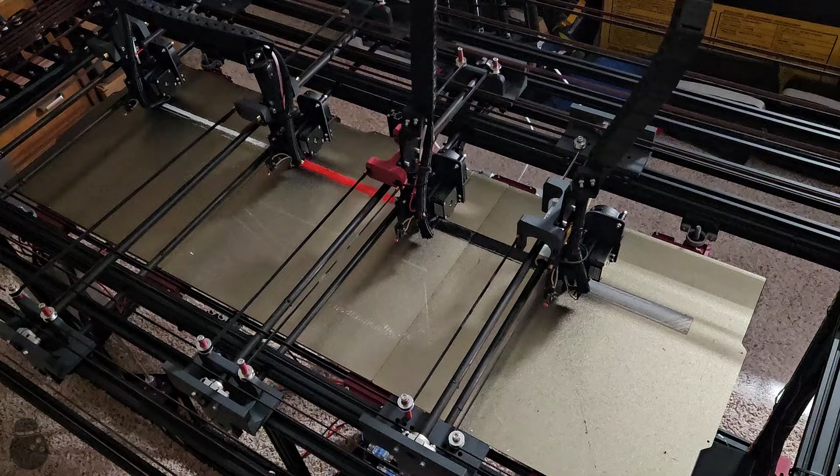Imagine all the things you could print if you didn't have to worry about print size or the colors or materials you wanted to use. Imagine what truly uncompromised printing looks like.

Basic printers let you turn your ideas to life, sure, but what if you want to print something bigger? Well, then you buy a bigger printer and are forced to wait longer to get your parts. What if you want multiple colors or materials? The existing printers can accommodate that, but at the cost of changeover time and wasted filament.

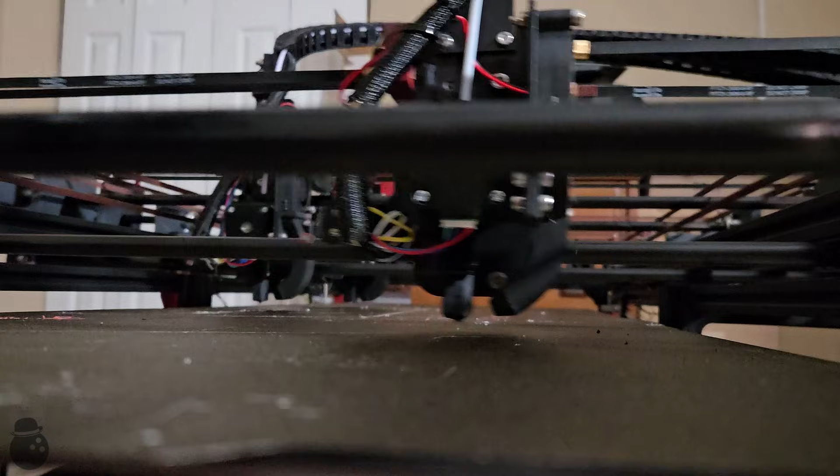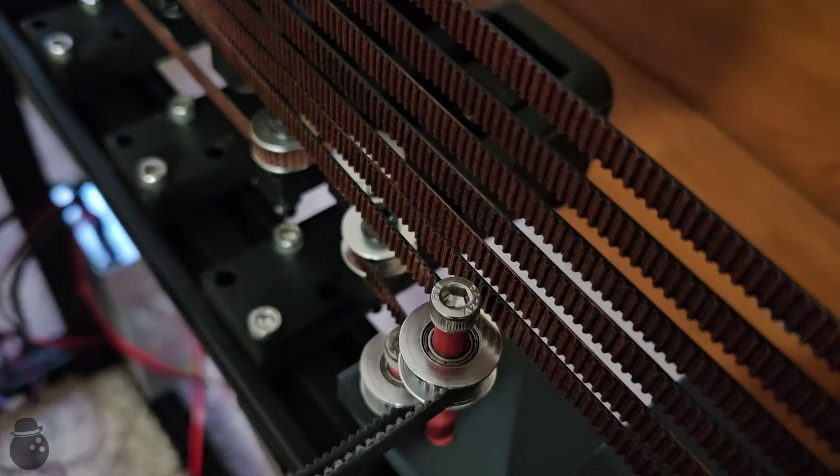What if you didn't have to compromise? What if you could print large objects in the same amount of time as small ones? Use multiple colors or materials with no changeover time because the printhead is already ready. That's where this printer comes in. A multi-head, simultaneous, independent, Core XY UV AB CD printer.

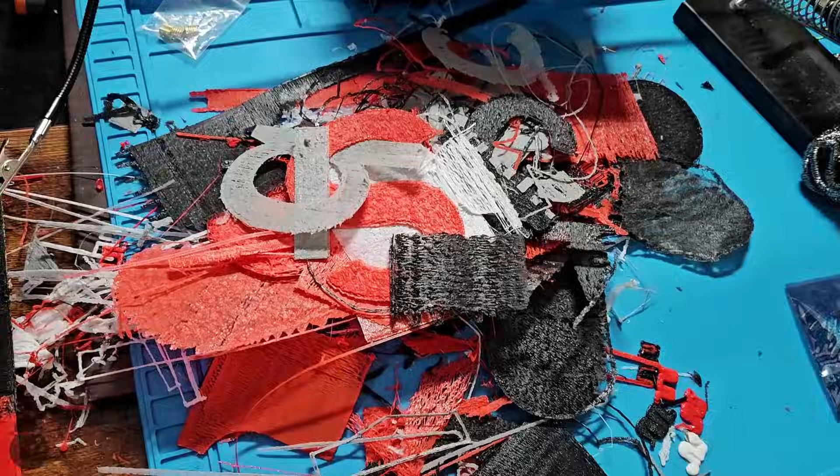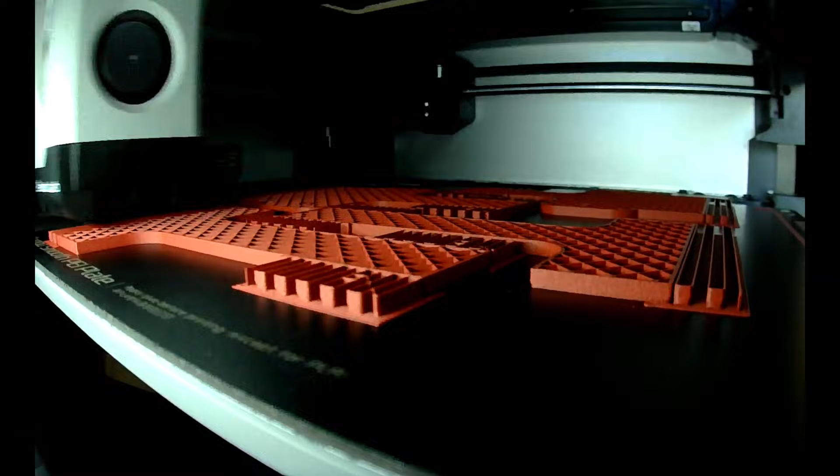It's taken me months to get this to the point I wanted to share and multiple failed prints and headaches, but here's the journey of how I built it and how you can get one yourself. The structural parts are made of carbon fiber rod and extruded aluminum, cut to size. The bulk of the rest of the parts are all 3D printed. There are quite a few of these, totaling 83 unique parts and just over 10 kilograms of plastic to print them all.

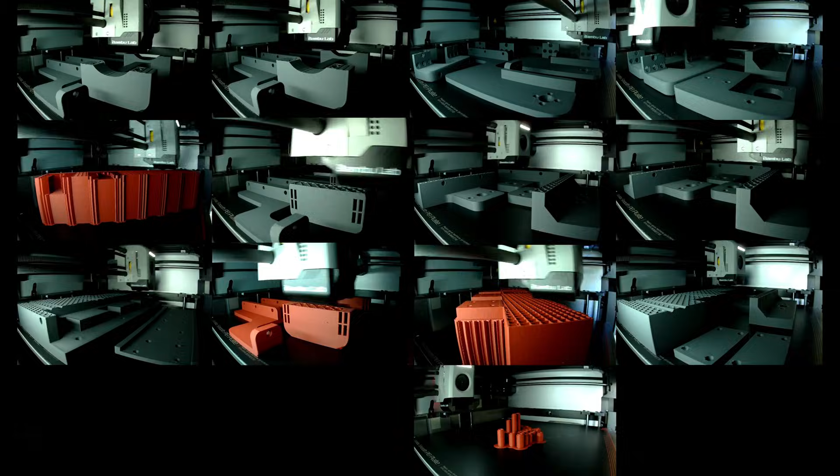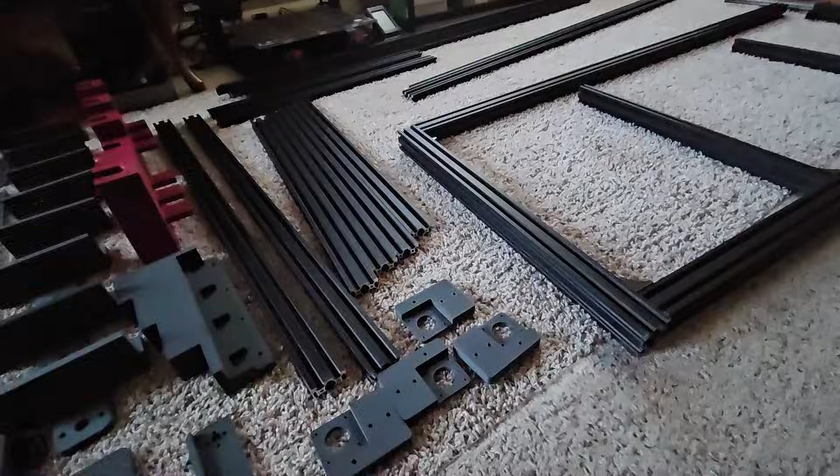The remaining items are all off-the-shelf components, most of which can be sourced via Amazon. I'll be honest, it is quite intimidating when laying all the parts out, but the satisfaction of putting it together quickly overtakes that feeling. The frame is sturdy and held together with a combination of metal brackets and plastic brackets held down with sliding and locking fasteners. The rails atop the frame are loaded with stages whose gantries span the slightly expanding rails, allowing them to nest within one another.

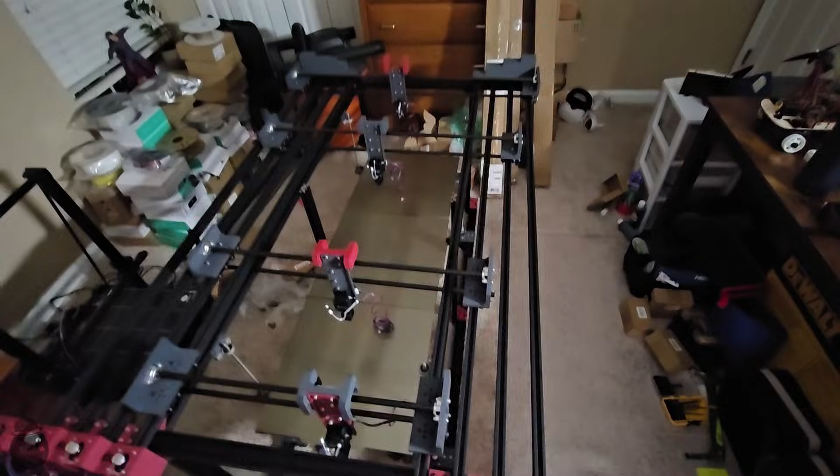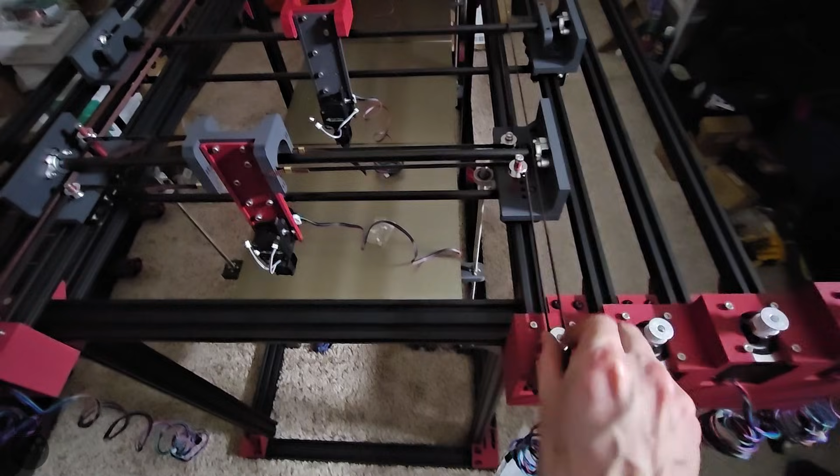The print bed is made up of three 410 by 410 mm heat beds. This enables efficient overlap and collaboration across the long direction. The motors in the front have corresponding pulleys in the rear, which establish the layered 3D maze of Core XY belts. The belts are wrapped around and driven by the motors, and the H-like shape allows the motors to move the printheads quickly, since most of the weight isn't on the printhead. Placing the last loop completes the motion system and leaves this pretty neat web of belts.

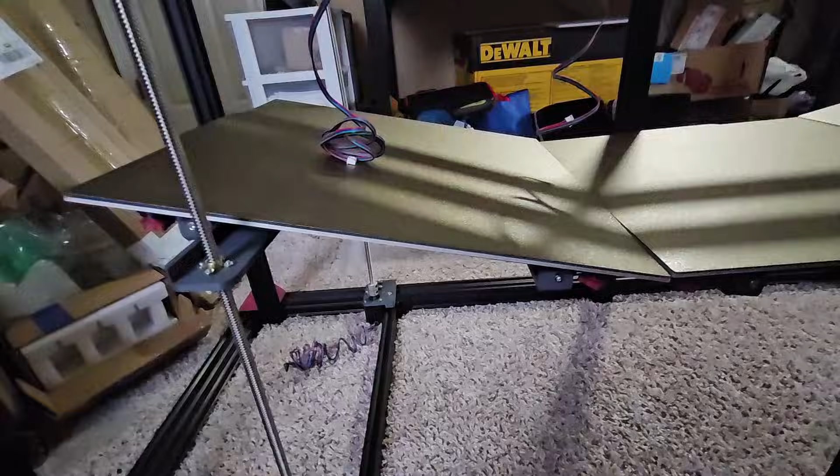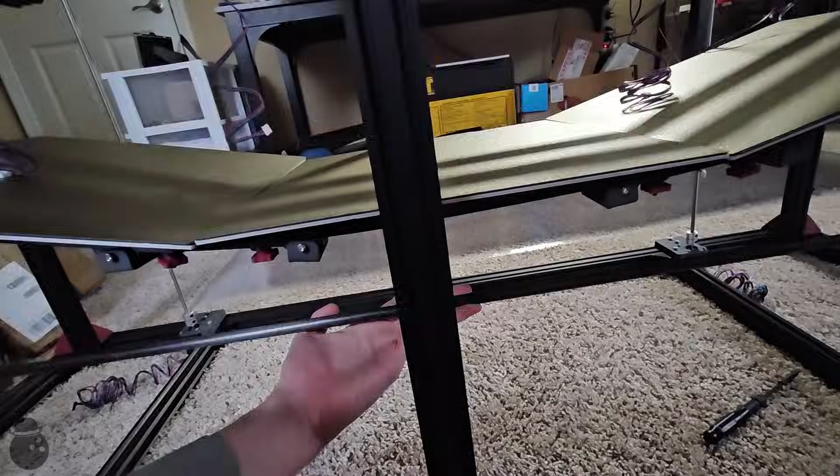My original design for the print beds involves a fully printed support structure, which isn't quite flat. The leftover carbon fiber rods seem to improve this significantly. With a few printed parts to hold them together, I can assemble and replace the frame, which leaves a much flatter work surface.

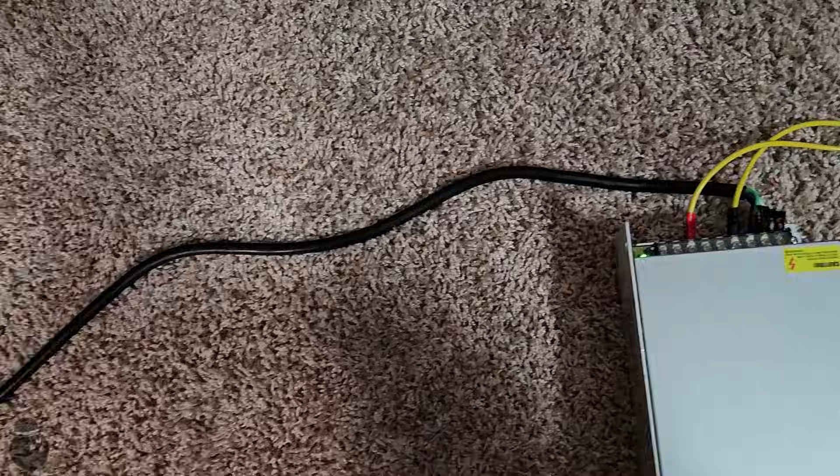I selected the Duet high current CNC electronics boards for this project, which require all the wires to be terminated in connectors. Wiring up the board to power and throwing on a basic configuration script, I was able to get motion. The boards are driven off of a very convenient web interface. The wiring for this project is a bit involved, with many of the off-the-shelf parts needing their wires extended in addition to having their connectors crimped up.

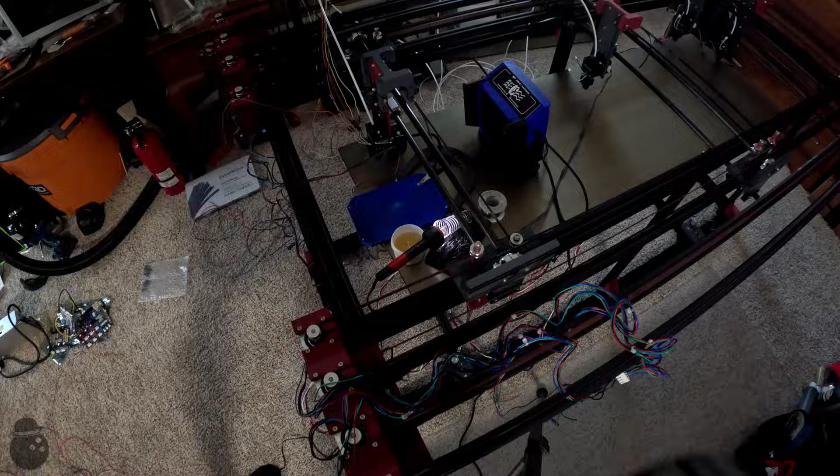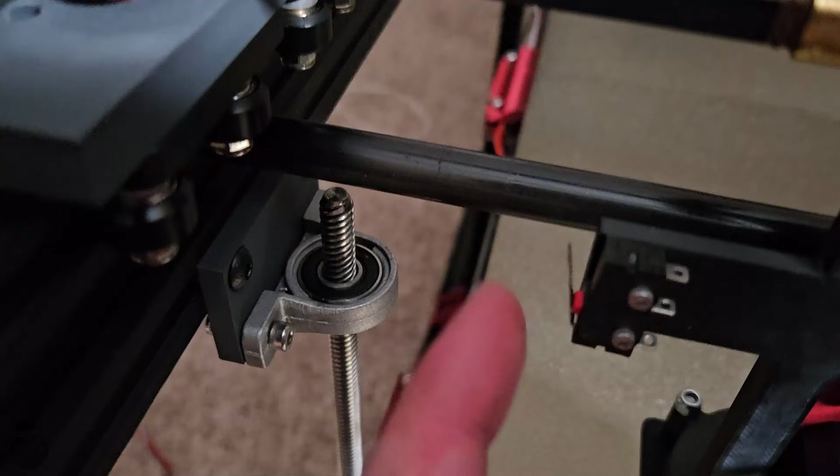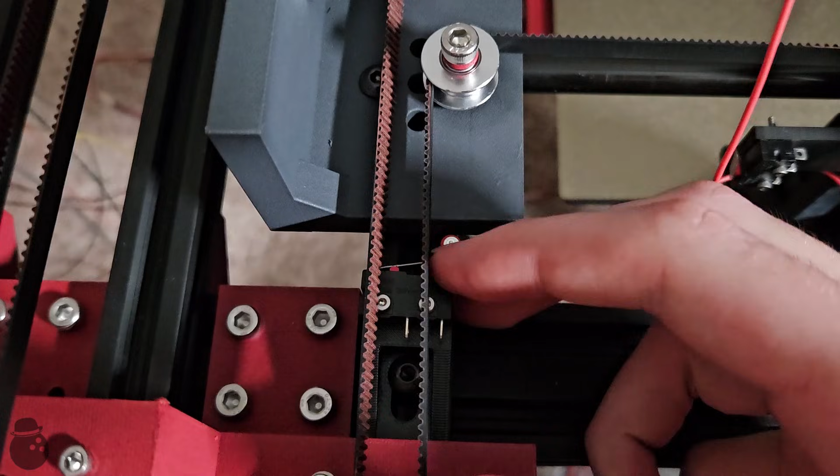With 4 stages, each with an extruder, 2 fans, a hot end, a thermistor, and an end stop, as well as 8 XY motors and 4 Z-axis motors, the wiring got somewhat tedious, but with enough music and patience, it isn't too bad. The X-axis end stops are slightly elongated to clear the Z-axis lead screws and contact the leftmost rails to 0. The Y-axis has end stops that are offset in the front of the printer to allow each stage to 0 without collision. They also set the minimum distance between stages.

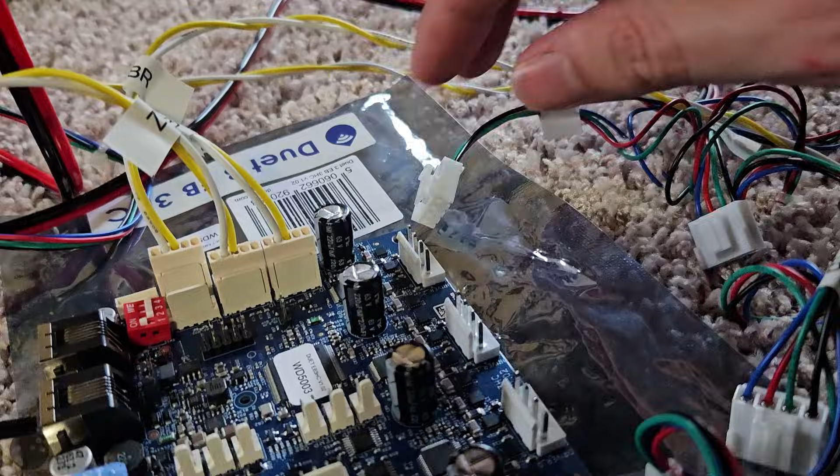With just over a dozen 2-meter long wires extending from each head, wire sheathing was a must. The wires then feed over the side of the printer and plug in neatly to the Duet boards. At the rear of the printer are 2 high wattage power supplies, which should both be able to work off of a single US wall outlet. Belt tension is important to keep the motors from slipping, so I printed out some test tensioners and installed them, which were sufficient enough to let the printhead make circles without slipping. Loading in some filament confirms the wiring was correct and that the printer can heat and extrude.

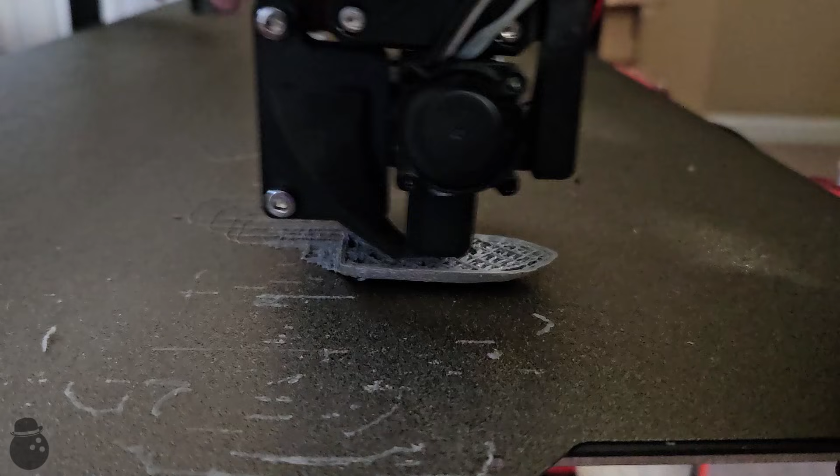For the first print, I simply loaded a Benchy into a standard slicer for a 410mm square bed and pasted it into the Duet software. The defaults in the G-code were in millimeters per second, and this printer needs millimeters per minute, so we get this very slow printing. Multiplying the values by 60 at the top of the G-code let the printer actually print. The belt tension still needs improving, as we were skipping steps and drifting the layers. When it doesn't skip, it prints fairly well. When it does skip, well...

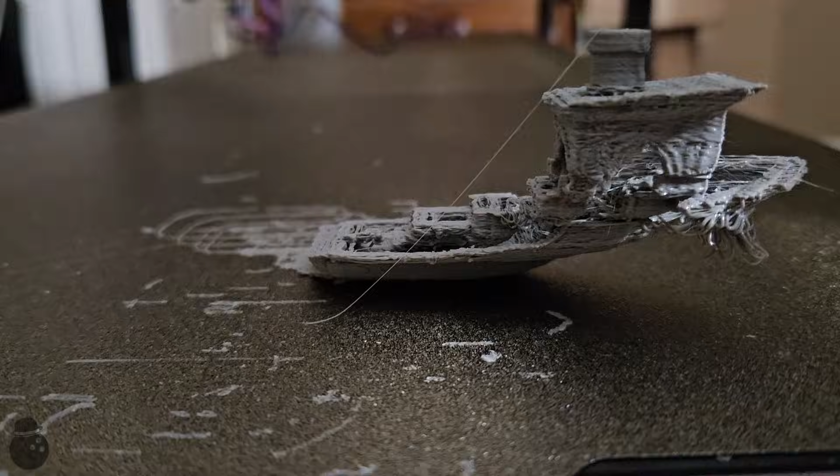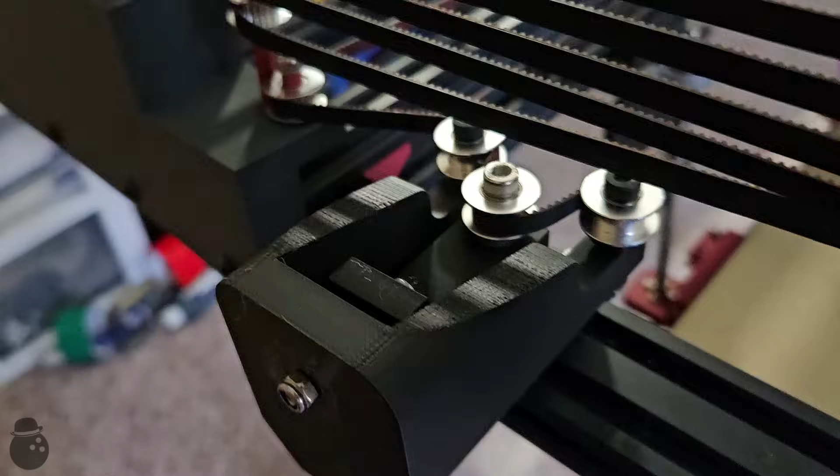For a first print, it was okay. You can at least sort of tell what it was supposed to be. I improved the design for the tensioners and affixed them to the rear of the printer for ease of access. Unfortunately, my attempts to tighten the bolts and increase the tension sheared through the rear belt pulley mount. This piece is a rather structurally important piece, so orientation and full infill are important.

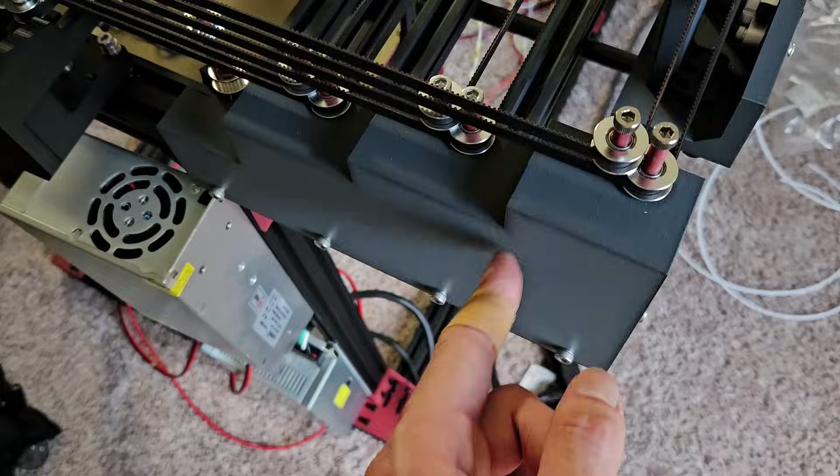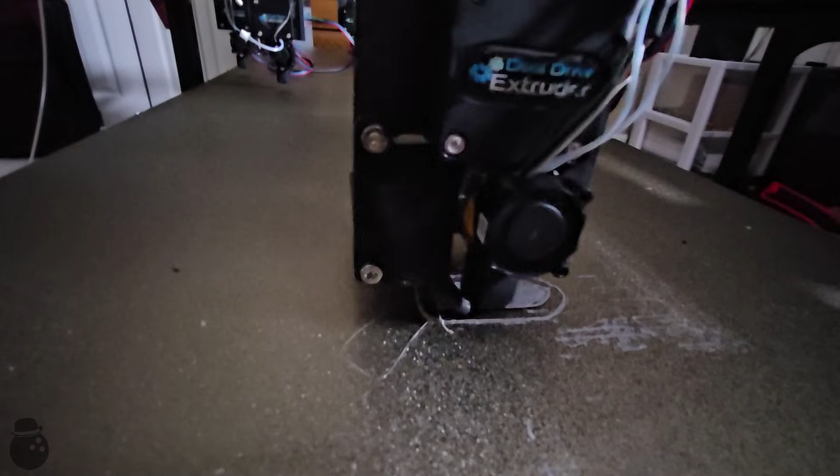The improved tensioners work wonders at stopping the drifting. It also helped that I increased the total allowable amperage within the configuration file to be closer to the motor's rated current of 2 amps instead of the 40% cap that they were set to. Those changes, however, did nothing to fix the filament I had accidentally broken within the very long Bowden tube. Whoops.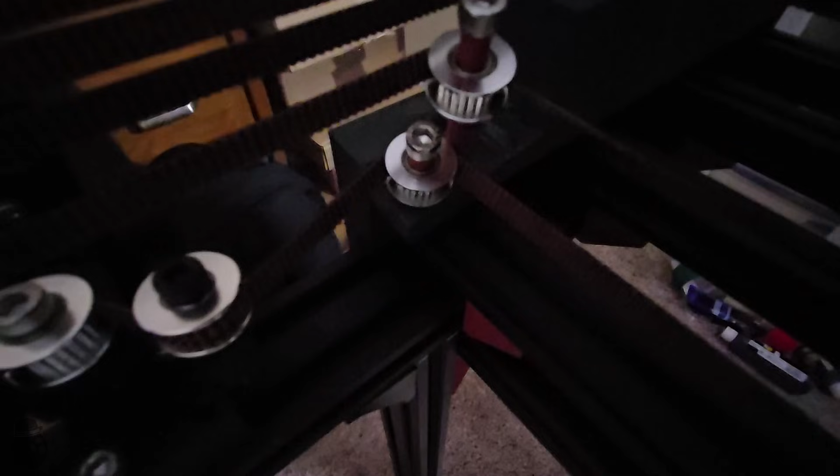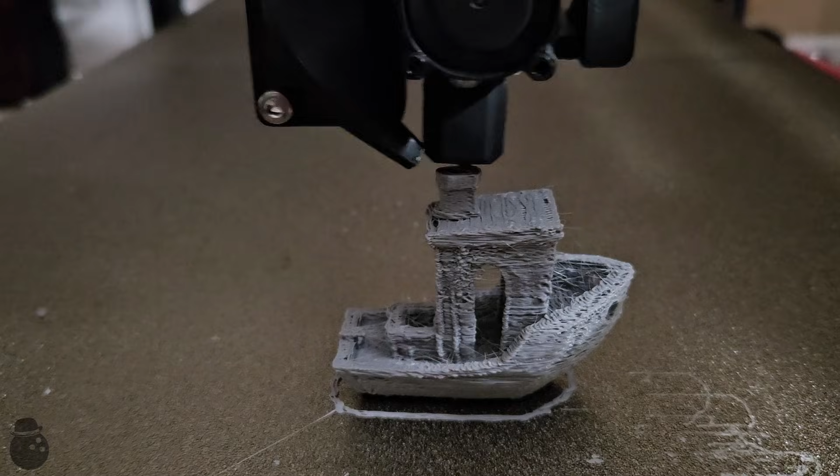Fixing that revealed bed adhesion is a problem. But hey, what was just a pile of metal a few minutes ago is making things. It also looks like the other rear pulley mount is failing, which I should have seen coming. Another full infill print should fix that. There we have it, our first benchy. Print quality leaves a bit to be desired, but we can work through that.

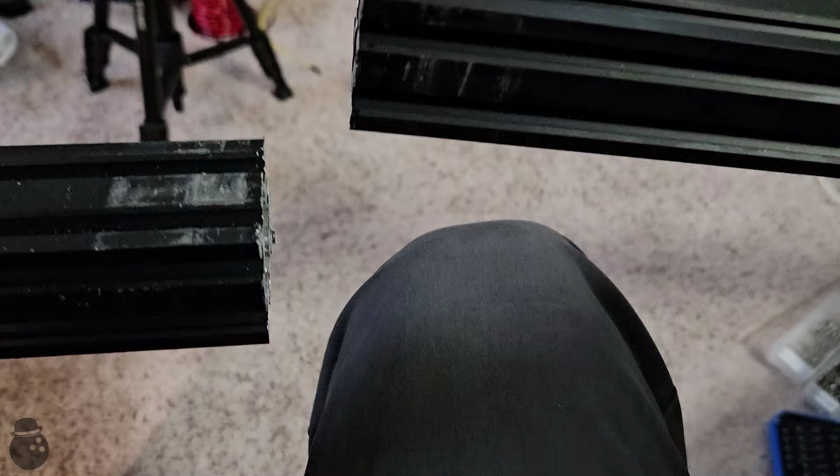Circling back to the bed adhesion problem, it appears that the carbon fiber tube frame is still not quite rigid enough and creates considerable bowing in the center of the bed, furthest from the Z-axis lead screws. Measurement reveals as much as 4 millimeters of deflection, which simply won't do when trying to have these printheads work together. We can reinforce the bed frame with the leftover 40/40 extrusion. Cutting to length and printing some structural clasps let it attach to the bed.

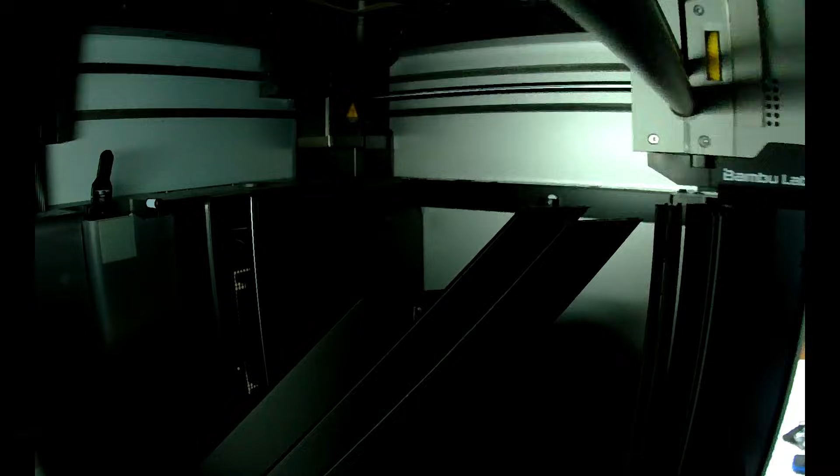To clean up the wire routing, I printed a containment plate. To it I added a cable chain and a wire cage to keep the wires from sagging onto the print bed. I then printed the remaining tensioners for the other 3 print heads. The relative heights are offset to prevent collisions across belts. Staggering their order further aids with this.

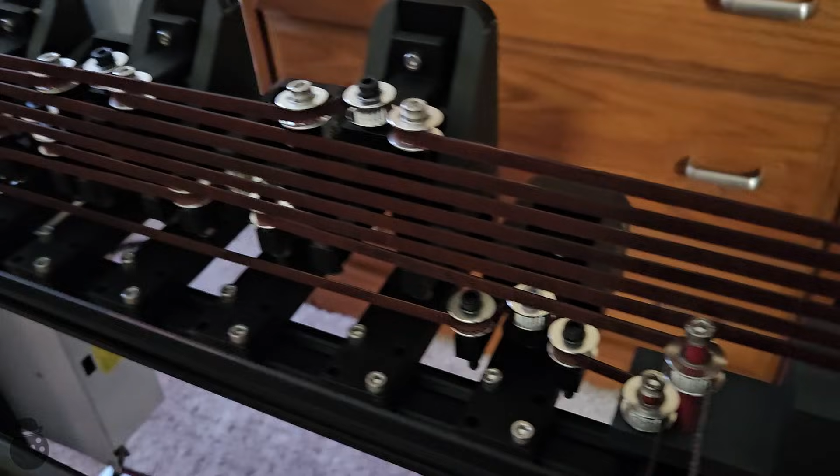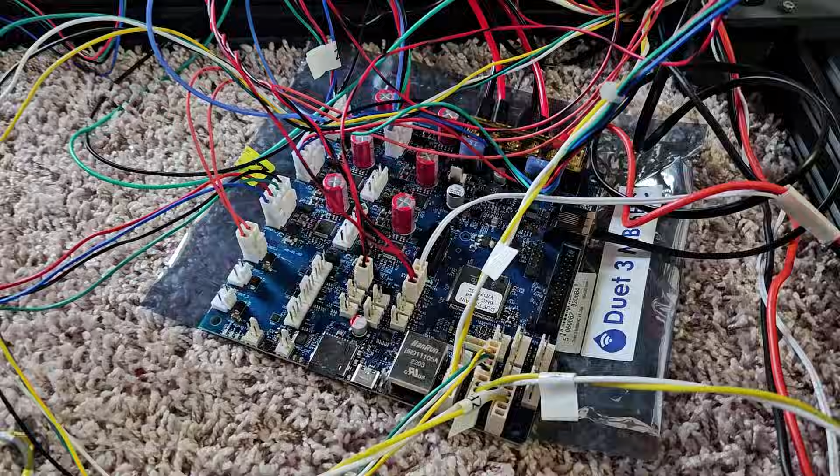The bed springs I had were not nearly strong enough for the weight of the 3 large beds, and get replaced by these high stiffness yellow ones. To affix the electronics and take them off my carpet, I printed mounts which hold both the main board and the expansion boards just off of the floor and on the frame. The hectic wiring quadrupled with the addition of the wires for the other 3 heads.

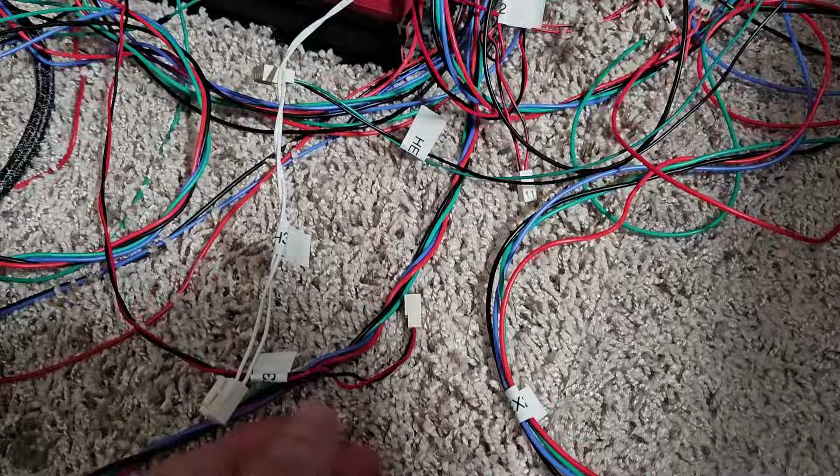Additional expansion boards and their mounts receive those wires and this Wi-Fi adapter, which allows me to stop needing a long Ethernet cable to communicate. For the boards to talk to each other, they use a CAN communication, the wires for which need to be the high-speed kind, and not the cheap phone wires that I happened to buy. With over 100 wires and most of them looking the same, labeling them was the only way to keep anything straight.

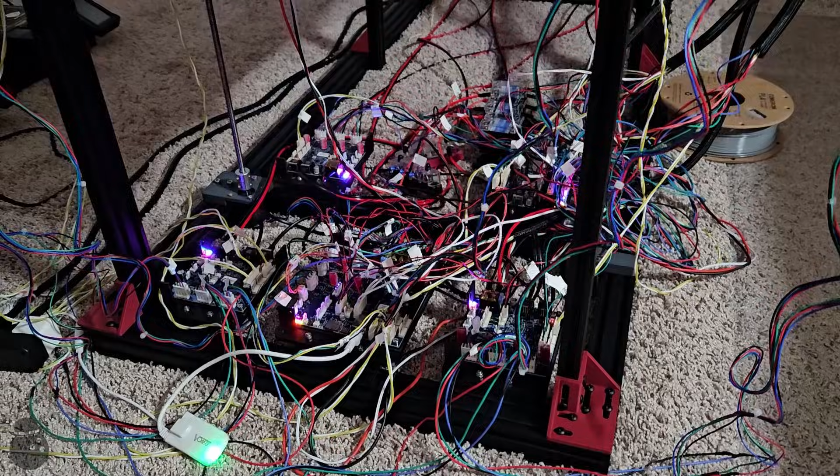To heat the beds and not overload the wall outlet, I have the print beds on individual solid-state relays, allowing for sequential heating routines. Placing the remaining wires into their channels and wire cages cleaned up the look considerably. Plugging in a power strip with both power supplies and the Wi-Fi adapter reveals that my wiring was all correct and everything glows appropriately. By configuring all 4 heads as a gang tool, I am able to move them all together in unison.

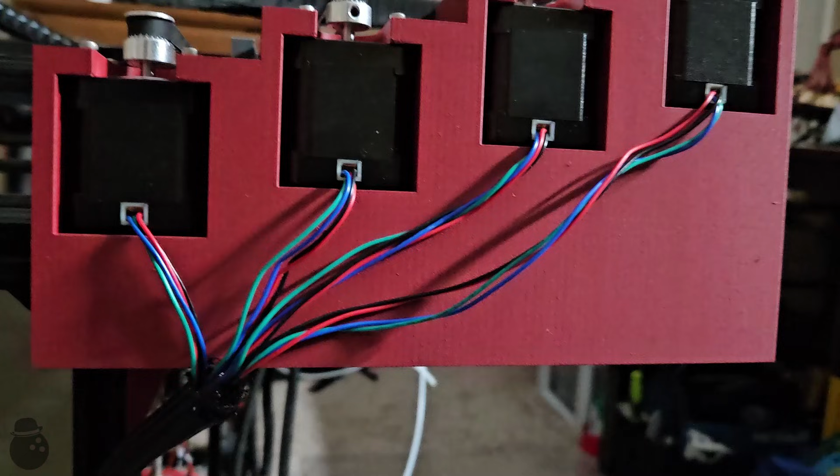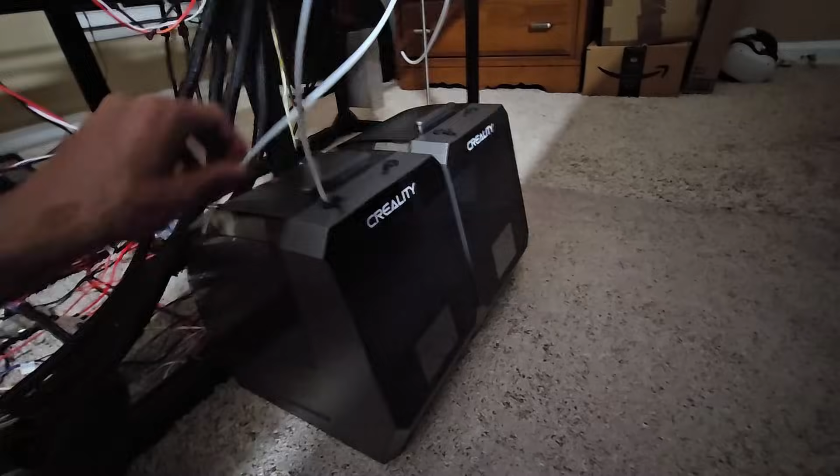Wire sheathing helps to declutter the drive axis motors on both the right and the left sides. The Bowden tubes still need to get cleaned up, but a handful of zip ties allow me to reduce the rat's nest that is these wires. These filament dryers neaten up the Bowden tubes and should allow for the printing of most engineering materials.

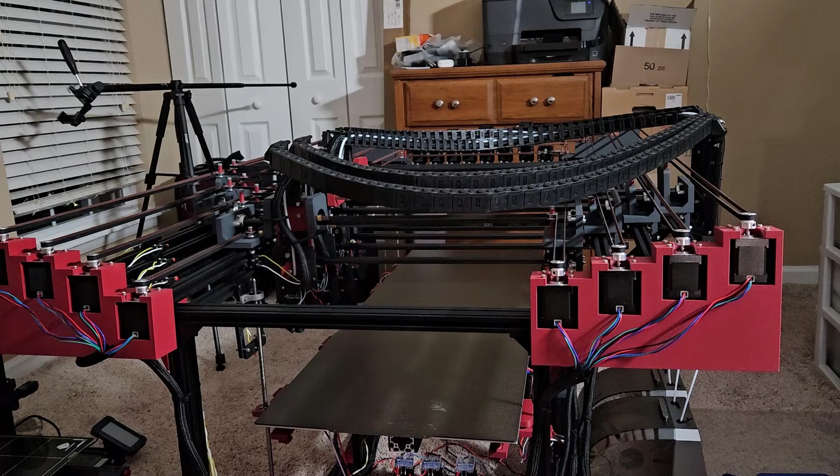Multiple heads require a custom homing script to dial everything in. To do this, I have various steps that drive all the heads as a gang tool and then pivot to singular head movements for fine zero. In the long axis, which I call Y, the printheads home sequentially, front to back. This ensures that they don't collide with one another.

To collaborate, the printheads are going to have to all be roughly the same height. Unfortunately, head 4, the rearmost, is going to begin its journey being the problem child of this build. While paper slides freely under the first 3 heads, number 4 dropped to contact the bed. At such a large span, this printhead's carbon fiber rods bow just enough more than the rest to cause issues.

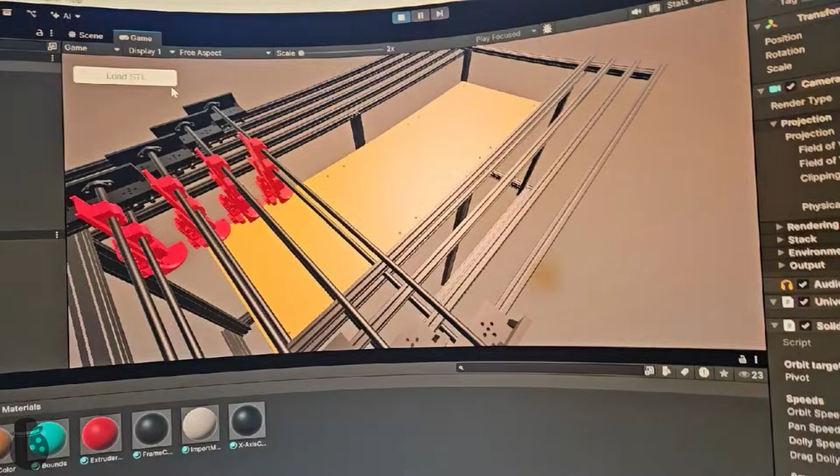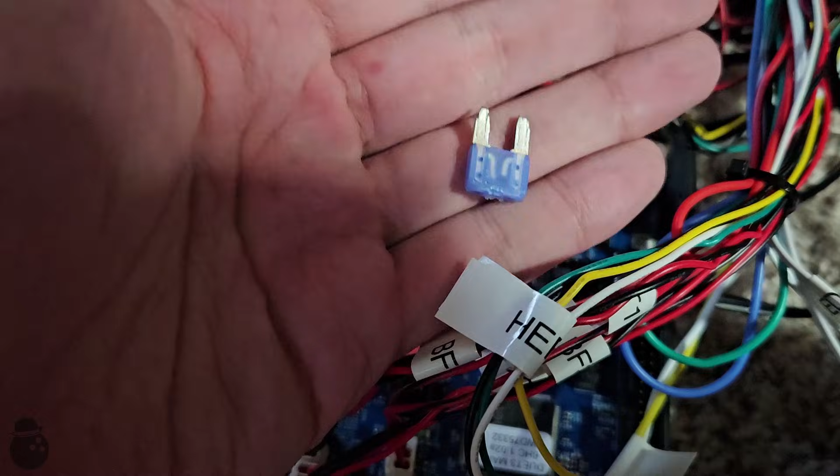To procrastinate the problem while I thought of solutions, I began writing the slicer for this printer. If I wanted to print anything collaboratively, I was going to need a custom solution, but I'll get into that more later. Powering multiple beds and relying on the Duet's fuse seemed like a good idea, but the initial surge of current fried the fuse. Luckily, they sell replacements, in packs of like 25. I don't really want to keep doing that, so let's give it a dedicated fuse.

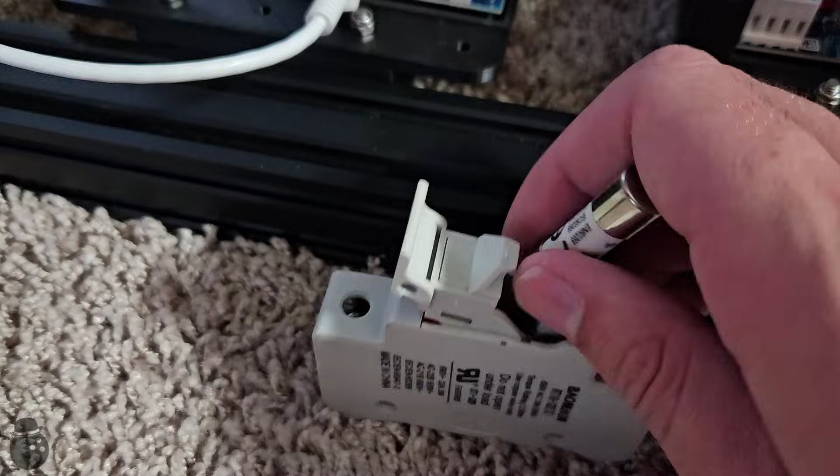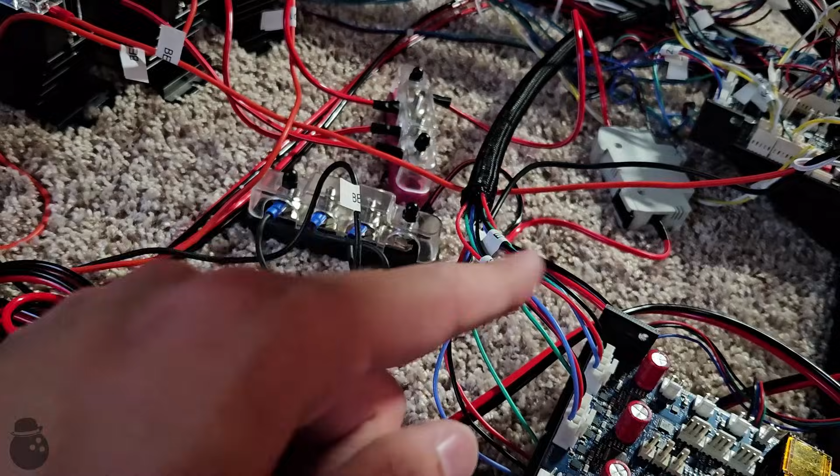This kind worked well for my filament recycler project, so let's try it here. The power runs from the power supply through the fuse onto the distribution terminals, which supply the solid-state relays with the opportunity for power. Each relay is controlled by wires from the Duet board, and the other side feeds up into the beds. It seems that this being an AC fuse for a DC system creates problems because this wire gets quite toasty. Why do I always have the most difficulty with the safety systems?

This 20 amp DC circuit breaker should fix that problem and let me reset it if I somehow trip it. Wiring it in and checking currents, it seems that I just misread the very confusing Chinese instructions for these solid-state relays and needed to swap which wire went to which. With that sorted and this circuit breaker in place, the correct current is going to the correct spots now.

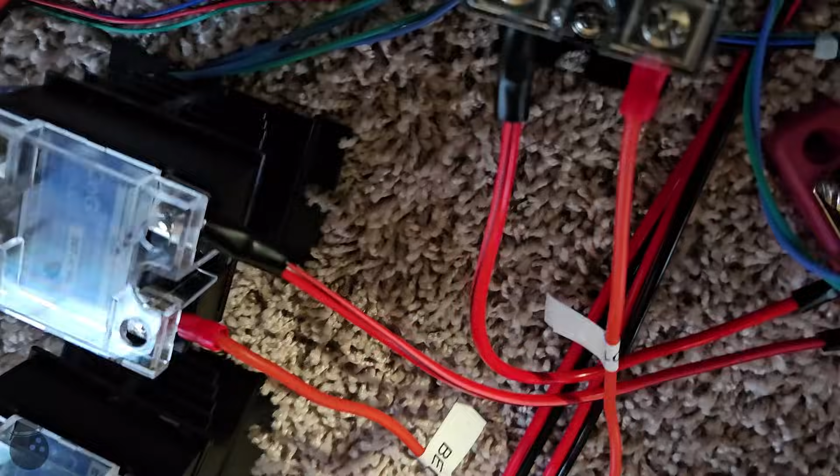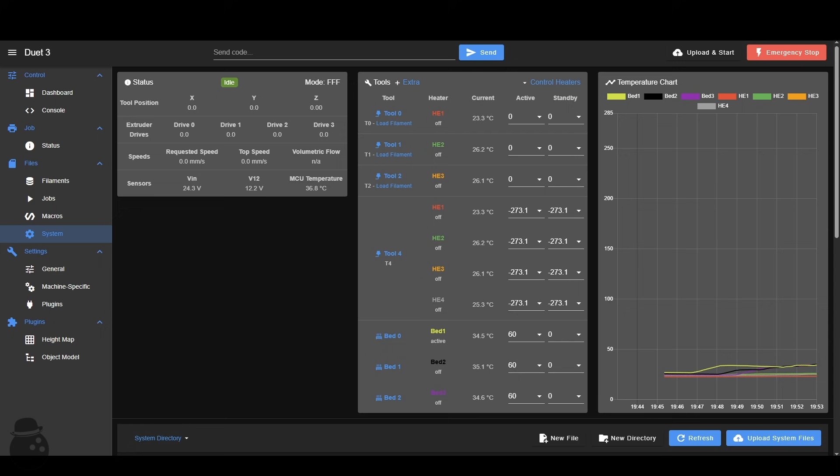To get this to work with Duet was a bit tricky. I wrote a daemon program which checks for active beds and cycles between them to reach the set point. The daemon monitors the system and ensures that only one heated bed is on at a time. The clock speed is a bit slow, so at startup there can be a brief few second draw to multiple beds at once, but nothing the system can't seem to handle temporarily. The relays also light up when they're on, which allows for a visual real-world gut check.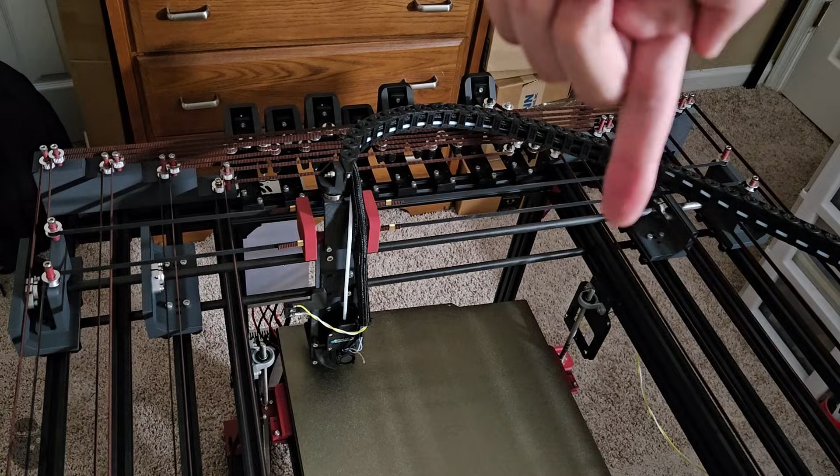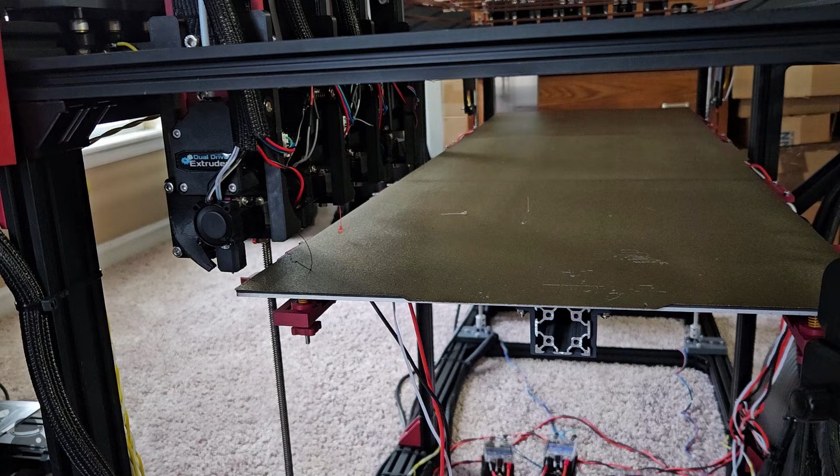Circling back on printhead 4, I found that I could simply add another support point on head 2's rails, and that created enough rigidity to solve the bowing problem. The orientation of the wire guides needed to be made vertical to afford them the motion they need without blocking the motion of the other heads and without touching the belts. With that solved, let's load up the Benchy print on the Gang tool to make 4 at once.

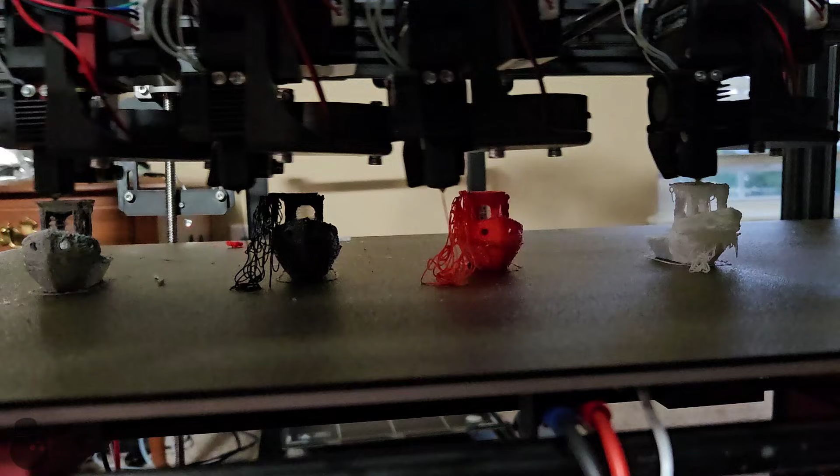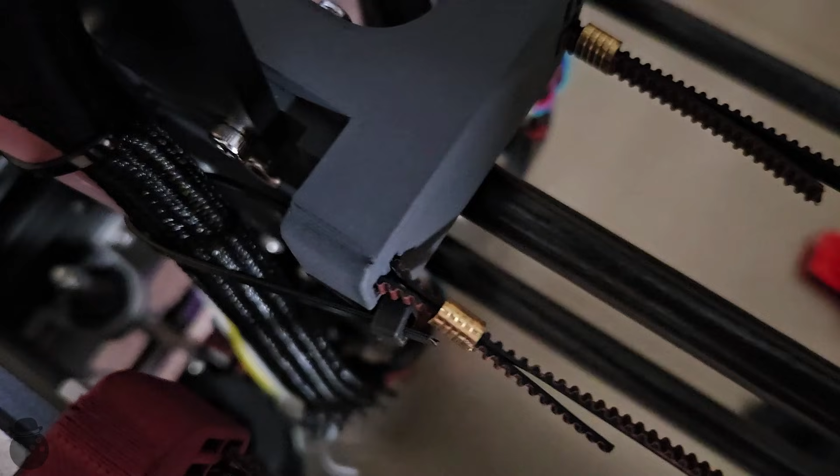Belt tension on the rear heads is clearly not quite dialed in yet. Regardless, the printer has made 4 Benchy-esque parts of varying quality. Investigating the belts further, it seems I fastened them too loosely, and with the belt facing the wrong direction within the clasp, which led to slipping. Multiple points along the printer are going to need to be updated. With that fixed, let's see what happens to print quality. Getting better, but still not what I want.

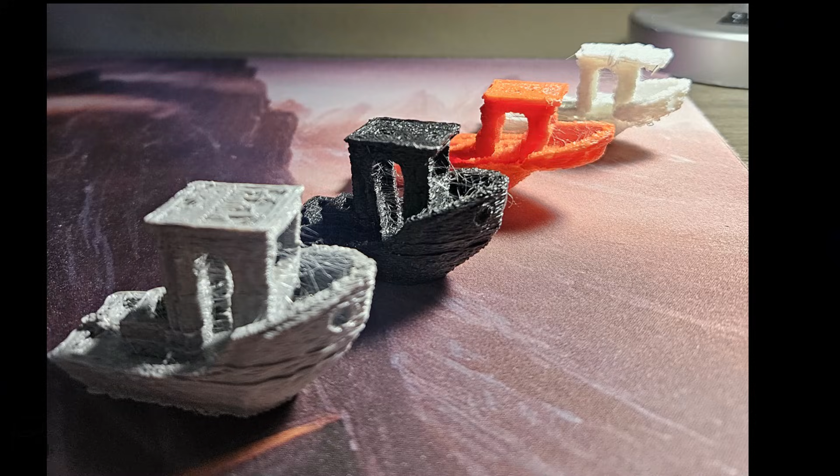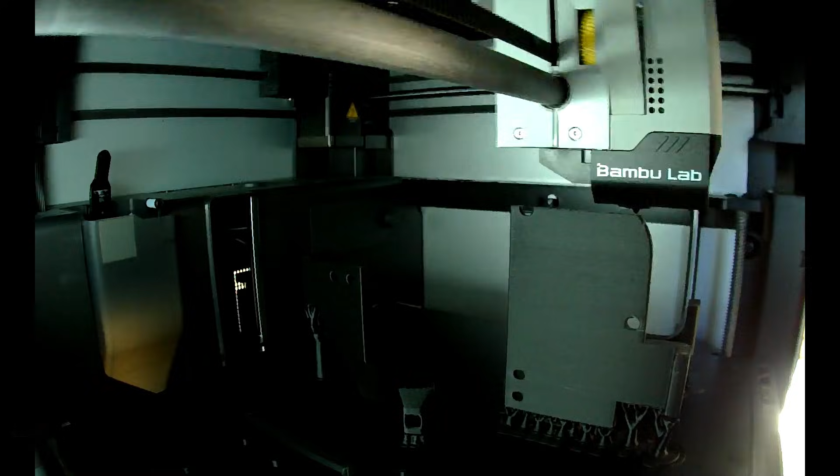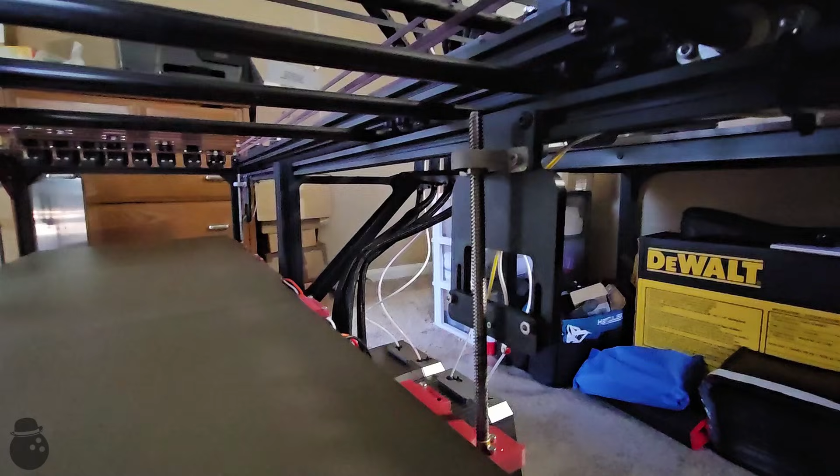I think that the quality issues are coming from the printheads being so long. If I consolidate the mass higher up, the print quality should improve, not to mention we'll gain Z volume. Printing it out quickly reveals the difference in size. The pieces rest much higher and more fully on their support rods. The nozzle tip ends up significantly higher. The increased nozzle height forces a redesign of the Z-axis limit switches. The first one attaches nicely, so now to do it 3 more times. The motion looks better with less wobble.

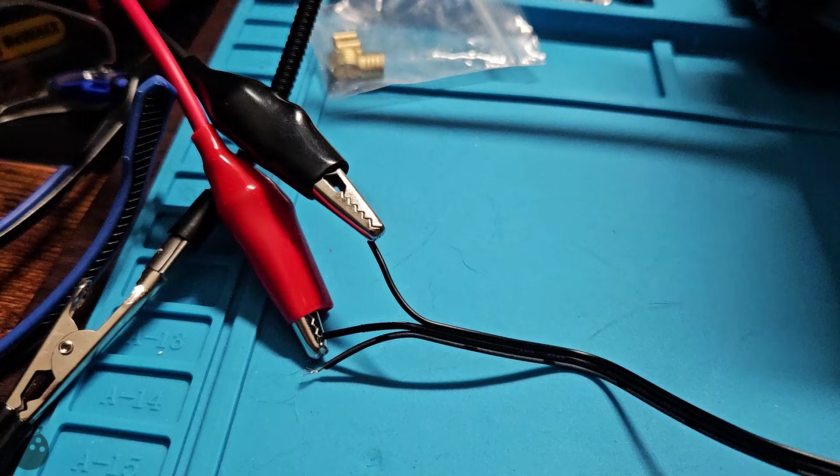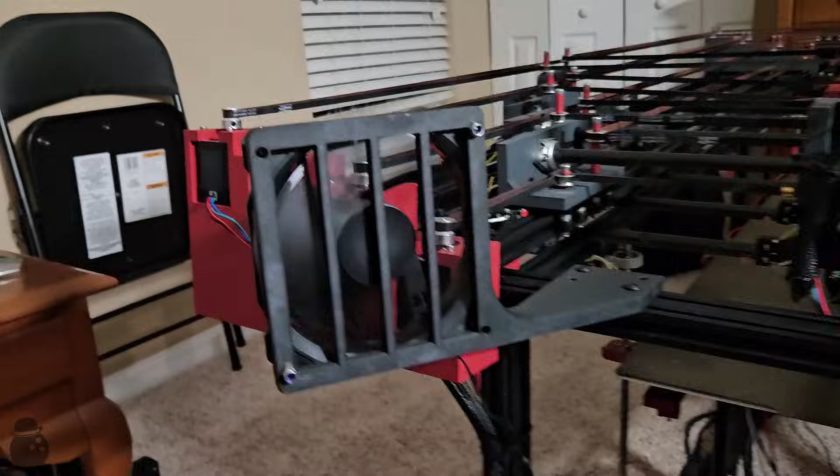I noticed that the electronics can get a bit warm during printing, so let's cool them down. A few computer fans with printed mounts let us cool the top drive motors and the lower electronics. The fans work nicely, and a mounting platform for the bed control stuff with its own fan helps to keep that tidy and cool. Loading filament with my hot end adapters has been a pain, so I improved them to be more sloped, which more easily guides the filament into the extruder. And with those, I'm extruding again in no time.

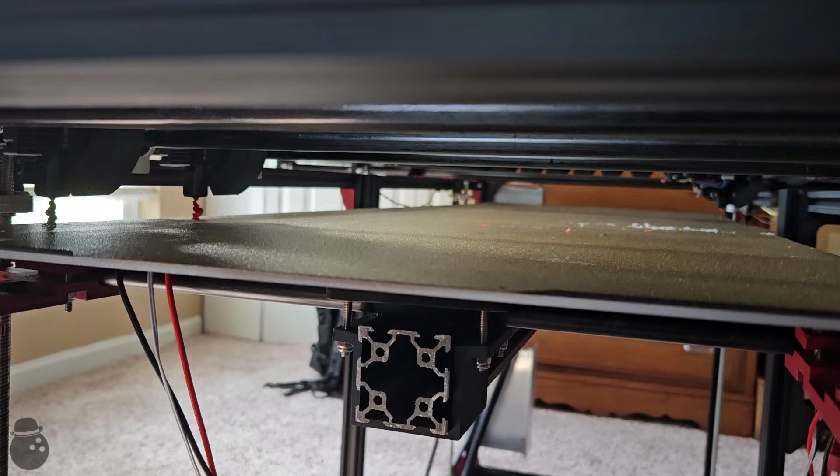Printhead 4 was in need of some lubricant, so I had it sit out this print, but this was looking very promising. Unfortunately, I had once again broken my brittle filament in head 1. Aside from that and some stringing, phase 1 of this printer is done.

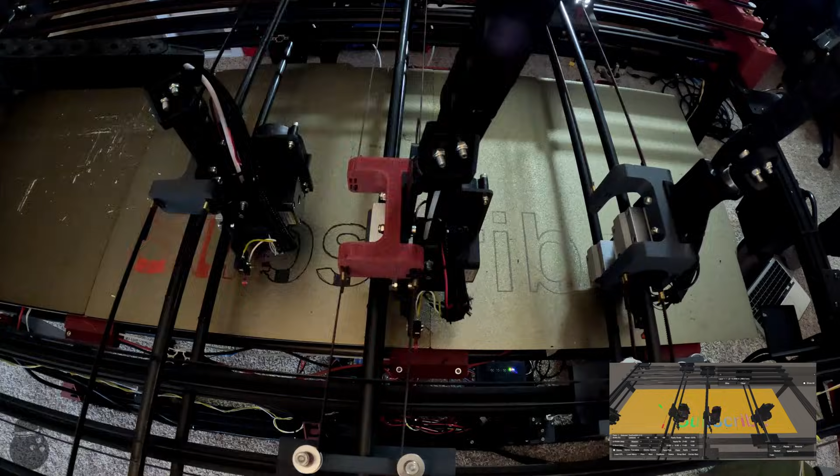Obviously, there's a lot more potential for this printer, and as it grows, I will continue to add upgrade kits to the shop. I have made considerable progress on the collaboration mode and want to work on multi-material printing and supports next.